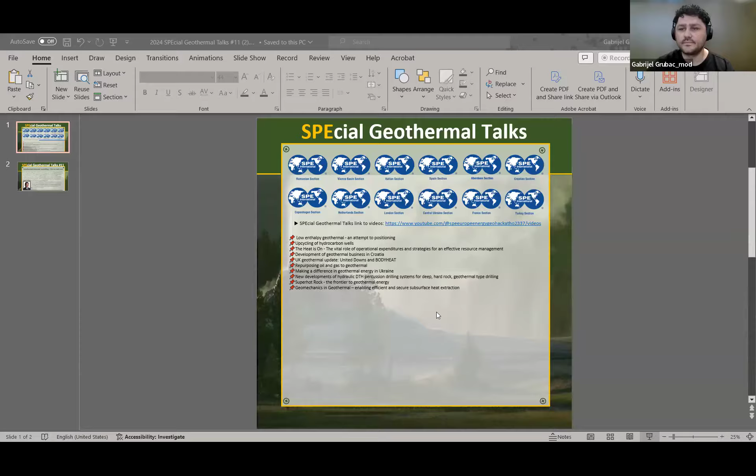I just wanted to give the audience a little bit of background on what the special talks really are. It's an effort, now with a lot more sections than when we started. We're 12 now, and I'd like to thank the SPE Aberdeen section for joining us recently, and Stewart for support in this. We have done, as you can see on the list, quite some interesting talks with some really involved personnel in the geothermal world and the oil and gas world.

The idea behind all this really was to educate the public, but also to keep strengthening the ties between oil and gas and geothermal, because there's a lot that we can learn from each other. This has turned out to be a good way of doing this.

As you can see, there is a link here, the YouTube link that I will put after in the chat box, and you can access it there and go back and watch all the other talks we did last year. We did everything from geothermal in Croatia to the body heat project to percussion drilling, a lot of interesting topics.

Without further ado, I would like to introduce our speaker today, Carlos Granado, who's got quite some extensive experience in reservoir simulation. Initially, when we had a talk with SPE Spain, whom I would like to officially thank for making this happen, the question we asked is, what are the topics that are of interest? And reservoir modeling, trying to understand the reservoir, is one of those things.

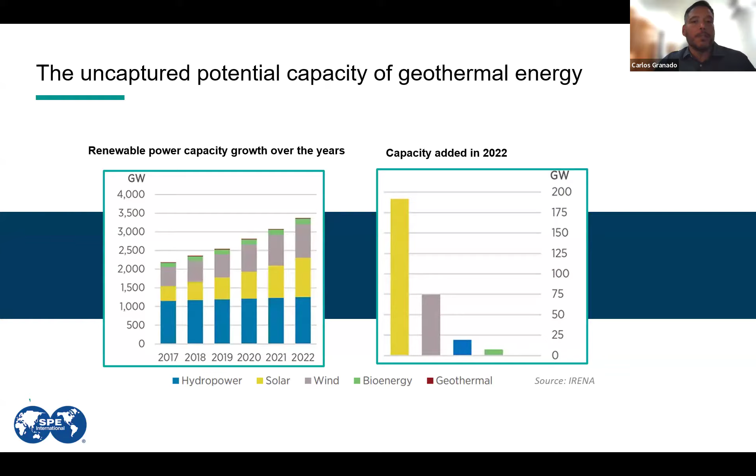Okay, so maybe it's time to start talking about the agenda. We're going to go into the introduction of geothermal energy. We're going to look at some specialized geothermal examples. We're going to be creating a basic geothermal case in order to show how easy it could be to generate at least the initial stage for modeling geothermal in a reservoir simulator.

I'm sure we're already aware of what geothermal energy is. It is a type of renewable energy taken from the earth's core. It comes from the heat generated during the original formation of the planet and the radioactive decay of material. This is a naturally occurring source of renewable energy.

As we know, the mantle rock named magma gets to some spot close to the surface near the crust, and this typically happens near tectonic plate boundaries, which are the areas where most volcanic and earthquake activity happens. When the magma comes toward the crust, the rock and water absorb the heat and create the geothermal reservoir, which is the basis of our activities for developing the energy.

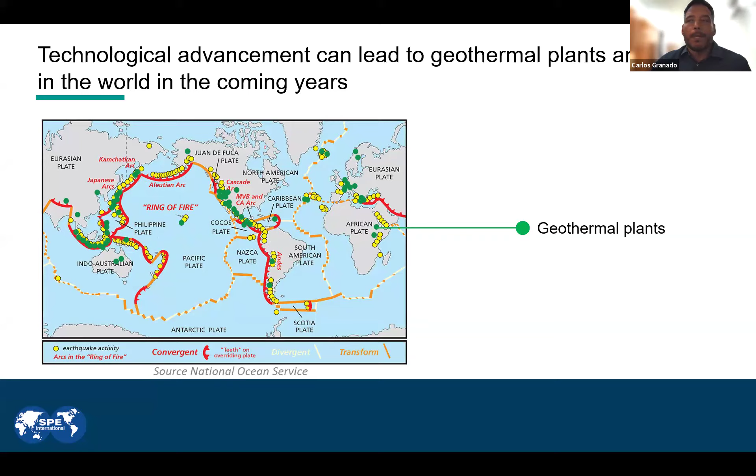Let's talk a little bit about the advantages and disadvantages of geothermal energy. Maybe this is the reason why geothermal hasn't been largely developed. Geothermal has a huge potential.

The current consumption is around 15 terawatts in the world, which is far from the potential of this energy. The geothermal resources right now, the installed capacity is around 17 gigawatts, which represents 5% of the total potential. Governments are trying to increase the amount of geothermal by reducing costs; the potential for generating energy from enhanced geothermal in the US is about 100 gigawatts, which is 25 times what we currently have, and could provide energy to at least 100 million American homes.

It is sustainable. Geothermal provides a reliable source of energy compared to other renewable resources, such as wind and solar. This is because the resource is always on, basically 24/7, 365 days a year. It doesn't depend on conditions like wind and solar do, so it's really sustainable and reliable.

The energy generated from this source is easy to calculate, since it doesn't fluctuate in the same way as other energy resources. It means we can predict the power output from the geothermal plant with a high degree of accuracy. On the other hand, we don't need to invest in any technology to convert this energy, or store it in big batteries or fields or anything. So this also has an advantage.

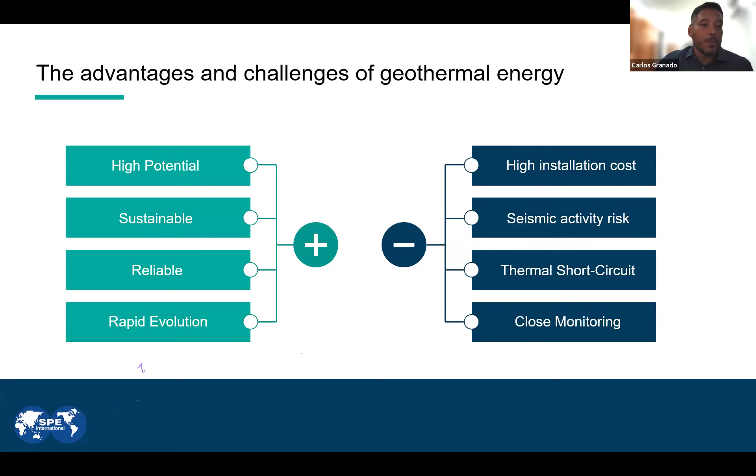So far, we could classify reservoirs into 3 types. We have the conventional geothermal source, which is more similar to an oil and gas reservoir. You could have a fault or fractured rock, which you could inject into or produce from, and obtain the heat or energy out of it. It requires faults, fractures, and some permeability in the reservoir, and also water, in order to be able to obtain the energy.

The second type is different, because there is no permeability and there is a possibility of having no fluids in it. So you need to create the conductivity by creating permeability, fracturing the rock and injecting fluid from one end and producing it from the other. This is called an enhanced geothermal system. There is an important amount of uncertainty related to it, because we are not necessarily aware of the stresses in the formation, since these are basically unknown formations. We need to account for and be sure that the way we are fracturing, and the way these fractures are behaving, guarantees that the project is going to be viable. So this is a big uncertainty to account for.

The third category, which is the most developed scenario in recent years, is closed systems. It consists of recirculating water from one end of the reservoir to the other end through vertical injectors that may connect to a bunch of multilateral wells at the bottom of the reservoir. It works like a big heat exchanger or radiator. We need to clearly understand the impact of the rates of water flow, the exposure of this water, and the time of exposure of the water to the formation, in order to understand the amount of heat or energy we can get out of this interaction between the water and the heated formation. This is important to account for, doing reservoir simulations as we are going to be talking about.

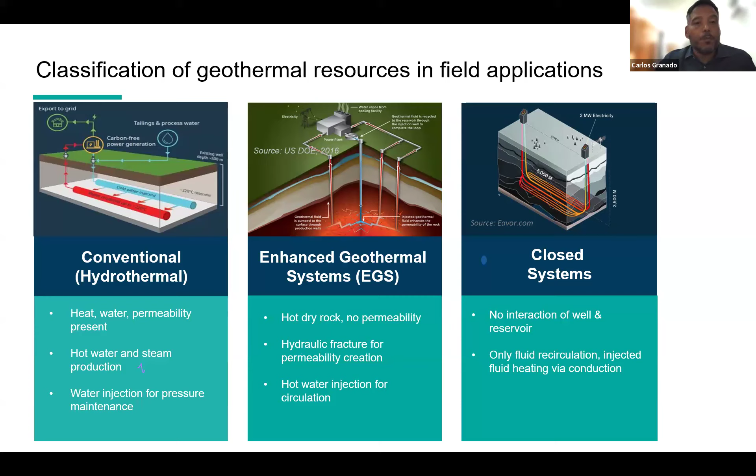Let's jump directly into the risk factors that involve geothermal projects. We have a bunch of factors that affect or create risk. We have political risk, regulatory risk that is usually insufficient and contradictory, and weak legal frameworks that don't help our case.

We also have financial risk because it depends on markets that might be fragmented, inefficient, and suffering from currency fluctuations. So at the end, the resources are not necessarily there.

As mentioned in the beginning of the presentation, we know some companies have benefited from programs launched by the U.S. government, by the Department of Energy, particularly the geothermal power earthshot, which is looking to reduce the cost of enhanced geothermal technologies by around 90% of what they cost right now. This is going to largely impact the feasibility of applying this type of project in other parts of the world.

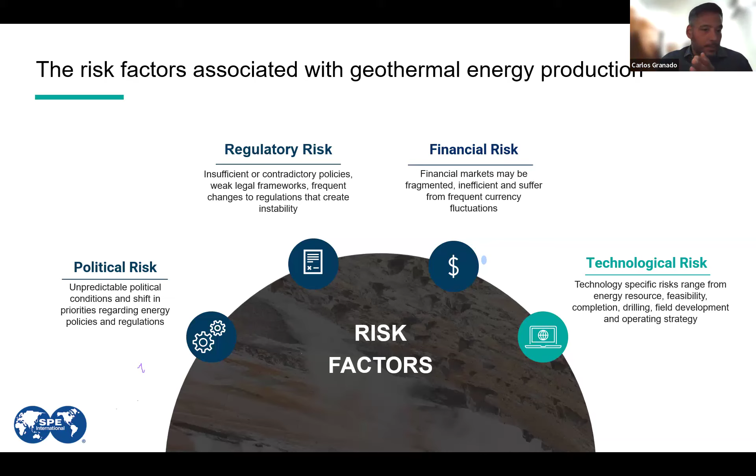Talking directly about the physics involved in geothermal reservoirs, companies should account for technologies that represent all these physical phenomena to grant a correct representation of the processes.

Let's start with fluid flow in porous media. Importantly, most of the flow in the geothermal reservoir occurs in natural fractures present in the formation, or generated in igneous rocks due to thermal stresses. Permeabilities are very small in this rock but still might account for some flow. The correct representation of flow in the fractures and the matrix is really important to accurately represent the physics of the process.

Heat transfer - conduction, convection, dispersion, counterflow of steam and water - whether the geothermal system is natural or man-made, heat transfer is the most important phenomenon, and it will be critical to evaluate the amount of energy you can obtain from the resource. This type of production strategy optimization is really important in order to get the best out of the resource regarding energy.

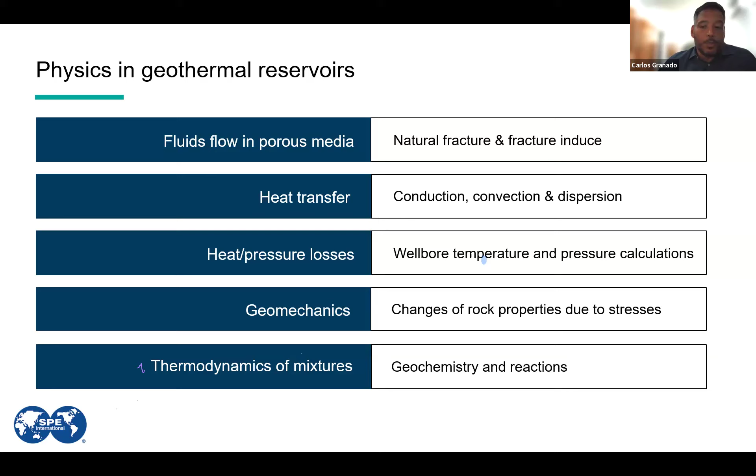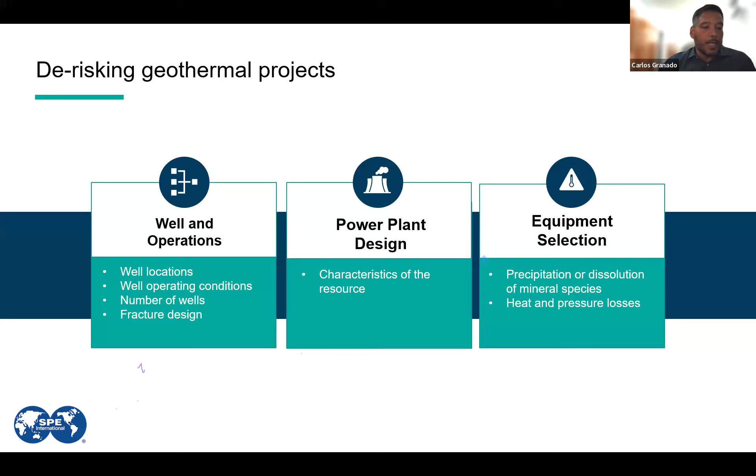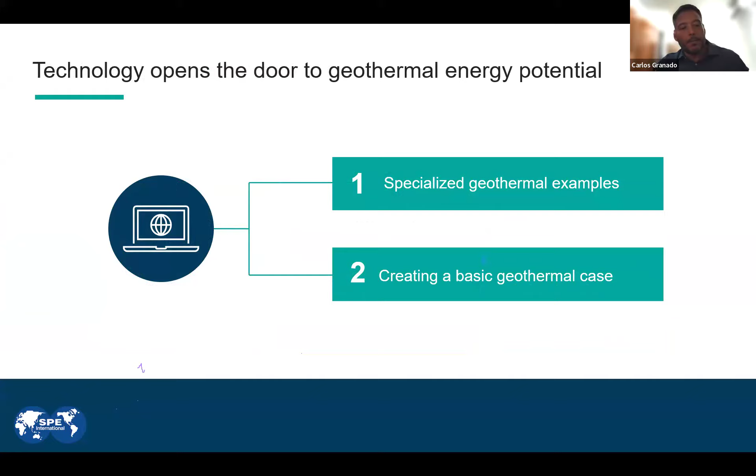So after talking about the physics, the phenomena, and the risks we have to overcome to implement this type of process, I'd like to go directly into the specialized geothermal examples that I prepared, doing this directly in our post-processor to make it more interactive.

The first case is a standard geothermal case. This consists of the completions of various production wells out of a geothermal reservoir. Here we account not only for the location, the type of completion, and the spacing between the wells, but also the possibility of cooling down the formation, or increasing the productivity of the energy by adding injector wells into the system.

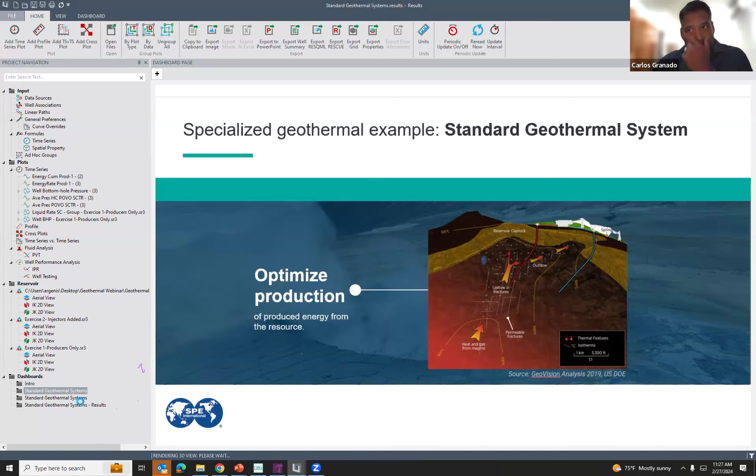I'll show you the impact of this. As we see here, we account not only for spacing, but also for the configuration used to produce the water. In this case we add different types of isolations into the system, and different tubing configurations, to find the best way of achieving the best temperature from the perforations into the wellbore. We also added some injecting wells into this case study.

Give me a second. Give me a sec. Give me a minute.

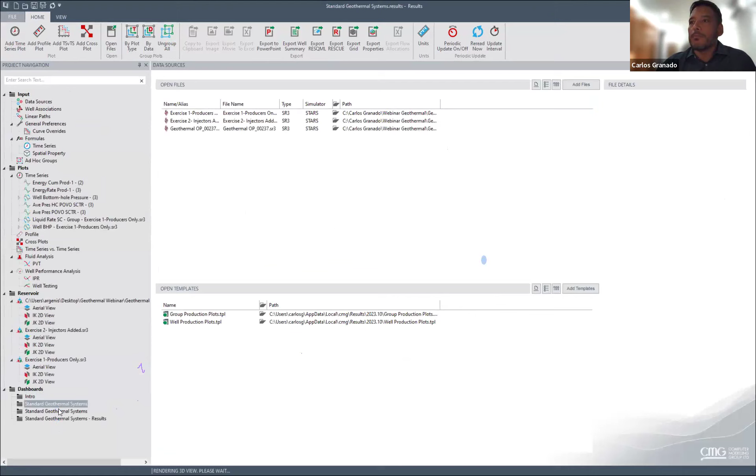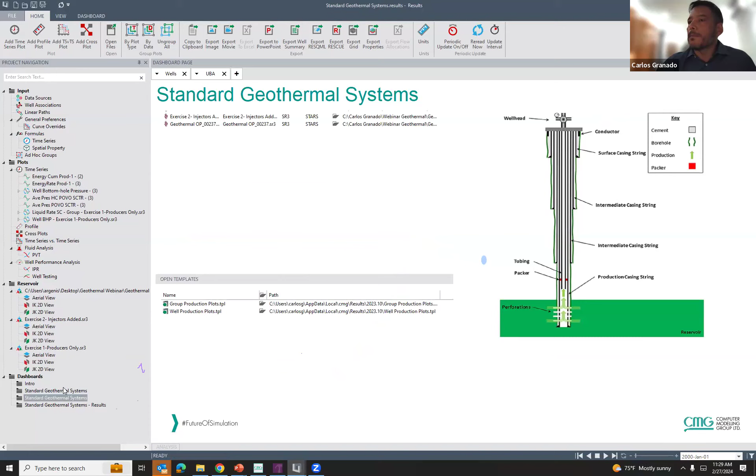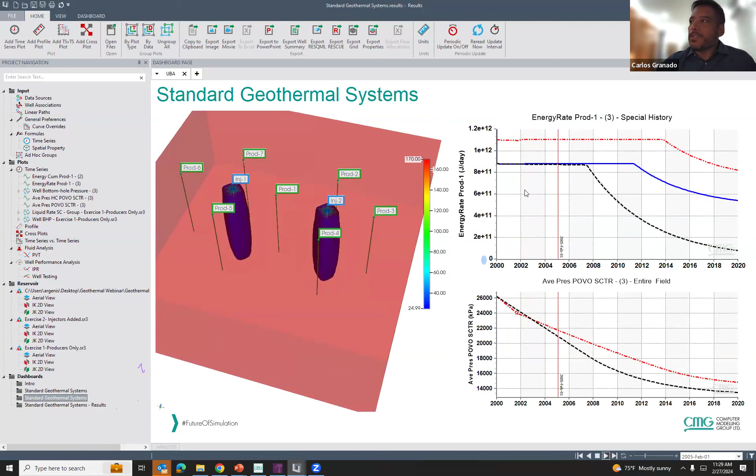Okay, sorry about that, I had a crash. So right here, I'll show you how we can see our original output for the energy, shown as the black dot, while we were just producing without any optimization on the well locations.

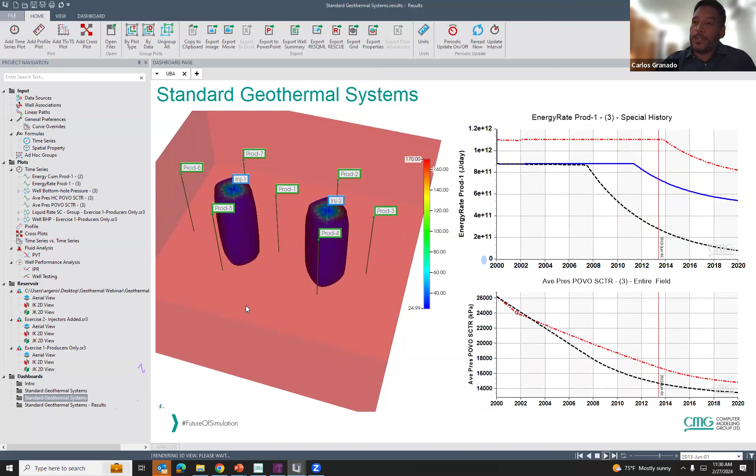In the second case, we tried to come up with a better configuration strategy and completion setup to achieve the highest temperature in the reservoir. In the final stage, we included some injector wells to increase the energy potential. We see how we can increase the energy of the project by almost 30%, a big change compared to what we originally had. This is why it's so important to run these optimizations, to find the correct, optimum strategy to obtain the maximum advantage of the resources.

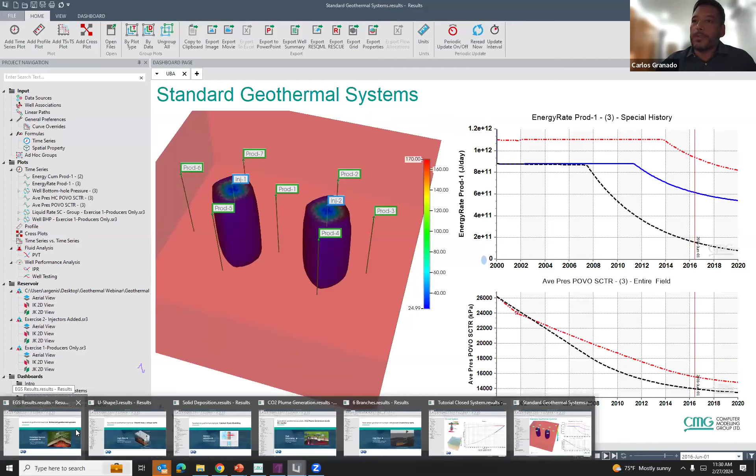The second case we'll present is an enhanced geothermal system. As mentioned, there's large uncertainty to account for in this kind of evaluation, because first we need to fracture the wells to create conductivity between the injectors and producers. We also need to account for the water and rates we use to expose the water to the heat of the formation and exchange heat.

We also need to account for what happens to these fractures once you start injecting water. The thermal stresses cause the fractures to open a bit more because of the cold water injection, and the compaction of the rock opens the fractures instead of closing them, as we see in the oil industry, creating a preferential path for the water to go directly from the injector into the producer.

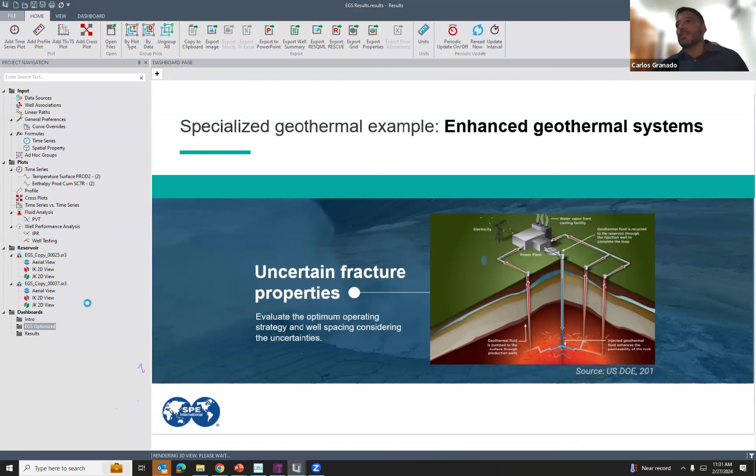So we use this technology to represent unconventional reservoirs in general. We model the fractures using what we call a tartan grid, or a logarithmic scale local grid refinement. With this technology, we guarantee we can represent the exact behavior of the fractures and the effective permeabilities from one well to another.

In this case, we were able to optimize the spacing. Let me stop a bit here - this shows two horizontal wells, one on top and one below. As you see, if we place the wells too close together, we risk having the water travel directly through the fractures from the injector to the producer, without enough exposure to heat, which ends up cooling down the formation inside.

So what we do here is we optimize not only the rates, not only the completions, but also the spacing between the wells. And we accounted for the fracture property changes during the process. With that, we managed to increment the production, at least the temperature of the produced water, by 15%, which is an important advantage compared to what we originally estimated.

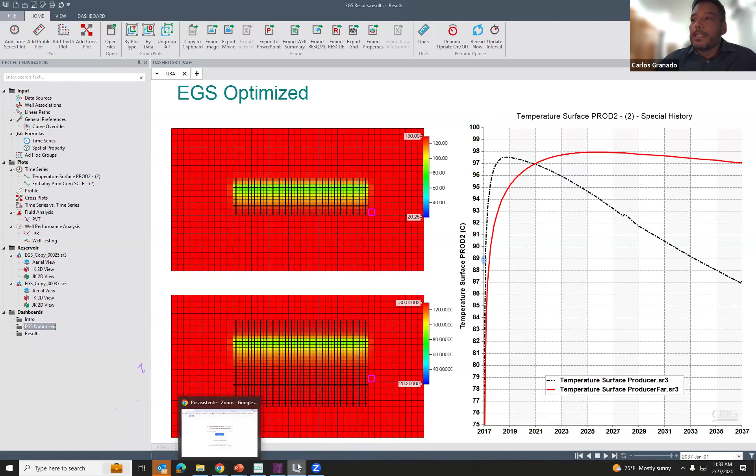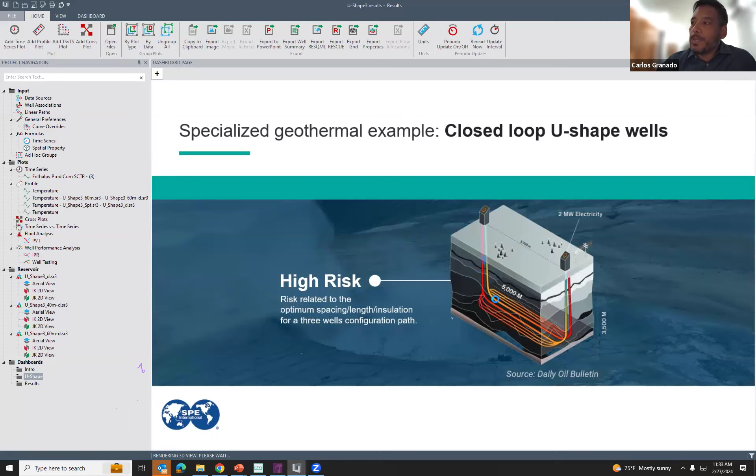Let's go into the third case. The third case is a closed loop U-shaped wells geothermal system. This is interesting because, as I mentioned, these are big heat interchangers, and the question to be answered here is: what's the distance, what is the length of these wells, and what is the distance between them in order to avoid cooling down the formation and having some kind of thermal short circuits? We performed simulations where we are able to represent the U-shaped wells in the simulator, and you can see them here graphically.

With this, we create sensitivities on the distance, the length, and the rates that we are going to be using. But the most important thing to show here is that if you compare the simulations between having the wells located at 20 meters, 40 meters, or 60 meters, it has an important change on the performance of the temperature, especially because when the wells are too close, the formation starts cooling down.

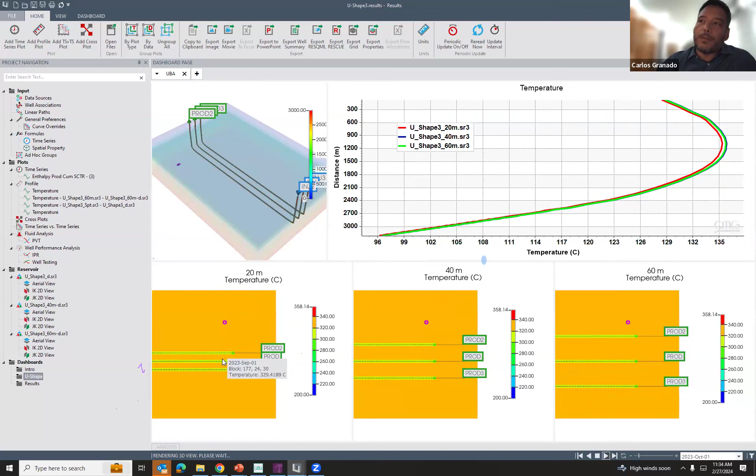I'm going to move forward to the end so we see the results. We see that with 20 meters, basically the formation is cooling down, the whole surroundings of the well cooling down after 10 years. The same happens at 40 meters. But when you have 60 meters, the heat of the formation keeps heating completely the surroundings of the well, incrementing the temperature of the head of the reservoir by around 15%, which is an important change compared to what we originally got.

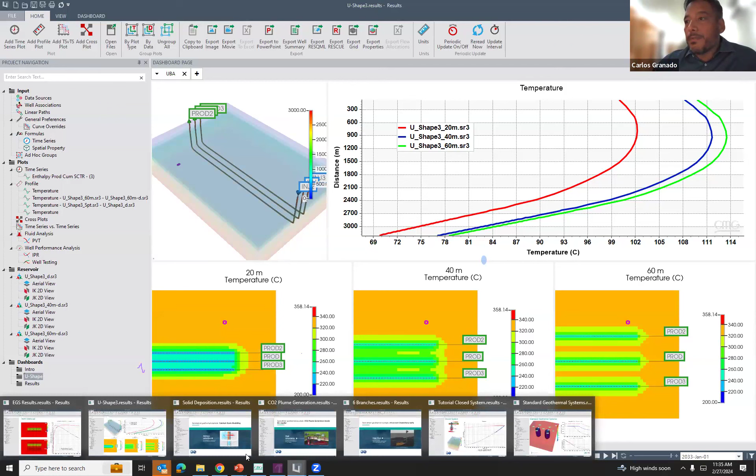The important thing here is that there is technology that allows you to represent the U-loop. This is not an easy task, to represent that from one end you are injecting, from the other end you are producing, and what happens in between. This is hard work to achieve, but technology has taken us to be able to represent this type of completion, and it's available for the public. So it is interesting to have.

Another case we can discuss is the calcium carbonate case. As we know, there is a lot of carbon dioxide present when you have geothermal fluids. With the pressure drops, the chemical equilibrium of the ground changes, and some of the CO2 might release into the gas phase. This process generates a kind of super-saturated calcite that will start depositing not only in the tubing but also in the formation, and this might end up affecting the flow in our system, and of course affecting the amount of energy we get out of the reservoir.

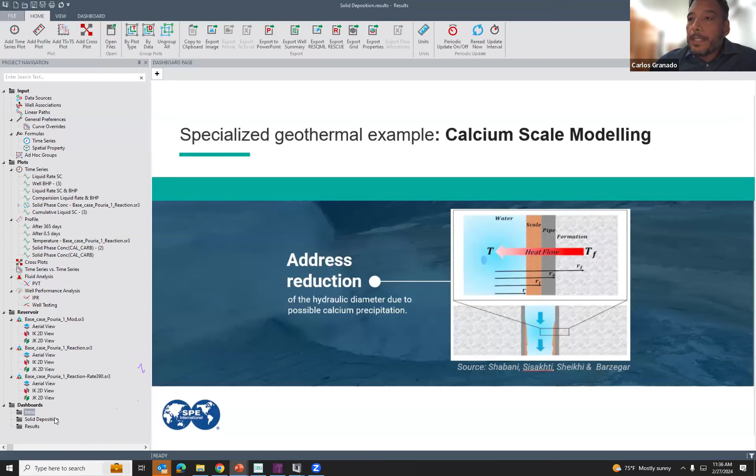We generated a case study using the results of calcite deposition, modeling the autoclave experiment into our simulator, and then taking it into the full field case. We can see here that after we complete the well and include the calcium carbonate precipitation, over time we see solid concentration increasing in the system. As a result, the hydraulic diameter, the effective diameter of the tubing, starts being affected exponentially.

If we compare what the results would be without including the chemical reactions or the calcite precipitation, we see that we estimate a completely wrong way of producing the energy. When you start including the calcium carbonate precipitation inside the system, we see the reduction of the liquid rate because of the reduction of the hydraulic diameter of the tubing. The interesting thing here is we use our optimization tool to find the optimum rate that allows us to produce the maximum amount of energy without causing the deposition of solids.

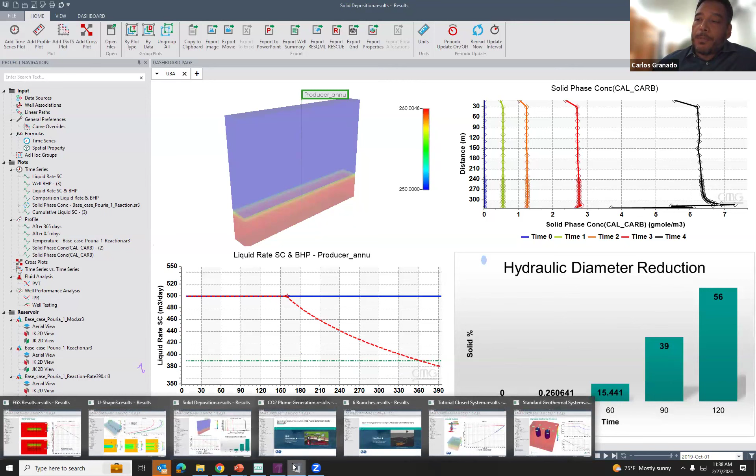We found that by just reducing the liquid rate in the system by 20%, we managed to avoid the precipitation of solids inside it. So this is another case that shows simulation can end up saving a lot of time and effort before implementation, or the calculation and estimation of what we're going to be producing from the resource. Another interesting case I wanted to talk about is the thermosiphon.

Thermosiphon is a combination of geothermal energy with CCS. Basically, we inject CO2 into a saline aquifer, and then we use the CO2 as the fluid to extract the energy out of it. Using CO2 as a subsurface fluid to extract energy has several advantages over water and brine, as it has much lower kinematic viscosity than water and brine, and the mass flow rate through the reservoir is higher than when you use water or brine in a geothermal system.

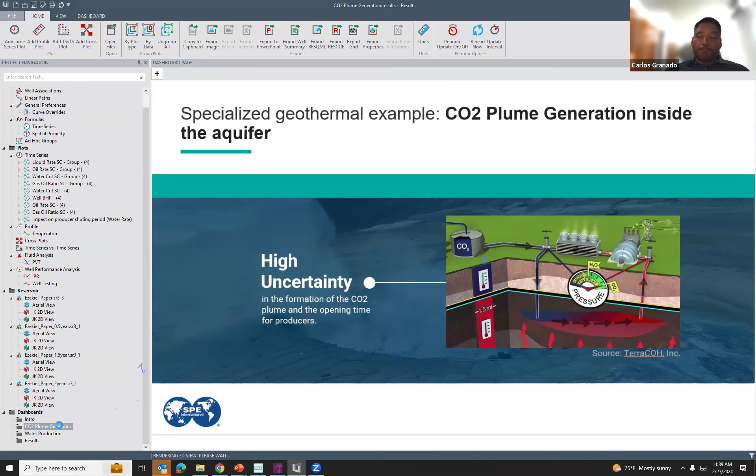The most important thing here to start is the generation of the CO2 plume. During this time, CO2 is injected into the reservoir to displace the brine in the production wells, creating what is called a CO2 plume. This stage is crucial because there needs to be sufficient CO2 in the reservoir to minimize the water coming out of the production wells before production commences.

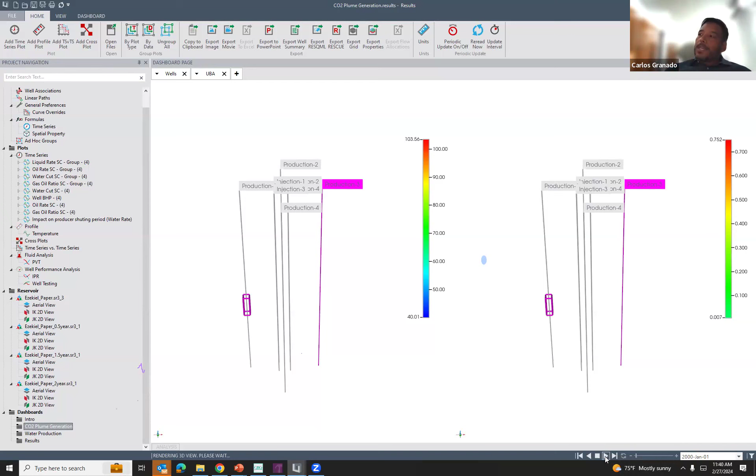During this stage, you want to displace the water out of this configuration of wells in order to allow the production of CO2 to be higher than at least 92-94% compared to what you produce in water. So the optimum point is to have a gas saturation at the producers that is over 60% compared to the original saturation.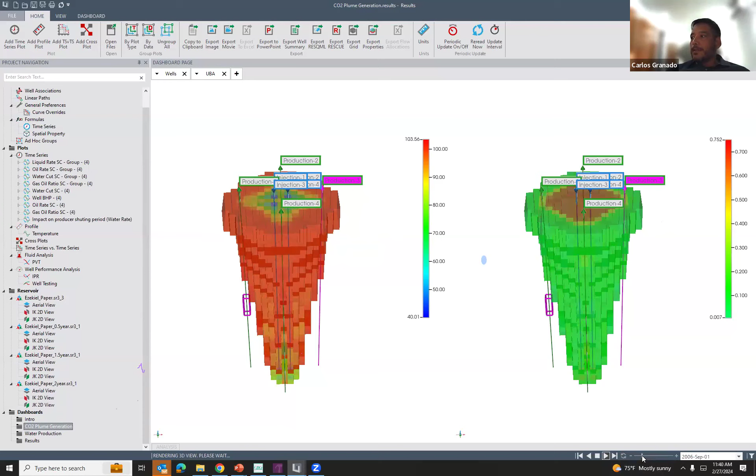We can see here in the two plots, on the left side is temperature. You can see how the CO2, once injected, gets heated, and on the right side of the screen, the saturation of the gas ends up being close to 60-70% near the wellbores, which confirms that the formation of the plume is correct and that the water is displaced out of the producers.

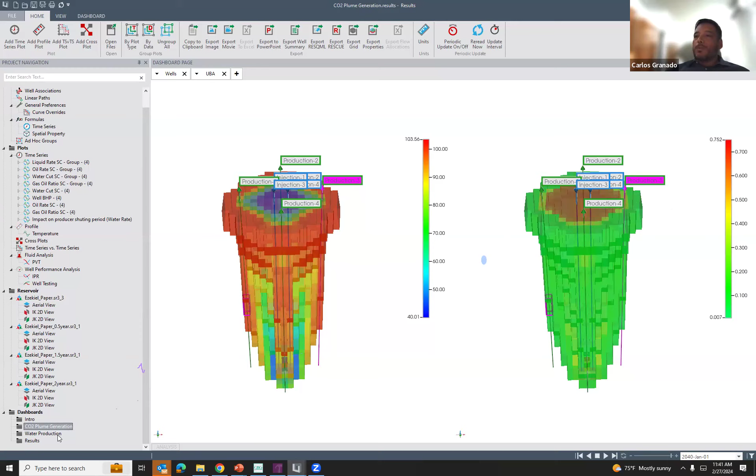The CO2 plume formation is a case with a lot of discussion, because it depends a lot on permeability, porosities, and also the configuration of the wells. But at the end, we are trying to model here what would be possible if we implement this type of project. We end up doing sensitivities on the closure time of the producers.

Keeping the injection going and keeping the producer wells shut for 2 years ensures the water is displaced out of them, and the production of CO2 being over 94%, which is good enough to grant the project. On the other hand, the temperature is sufficient to guarantee that the flash of CO2 at the surface will generate the power for the turbines that are going to be used, and then it can be re-injected into the reservoir again after the process is completed.

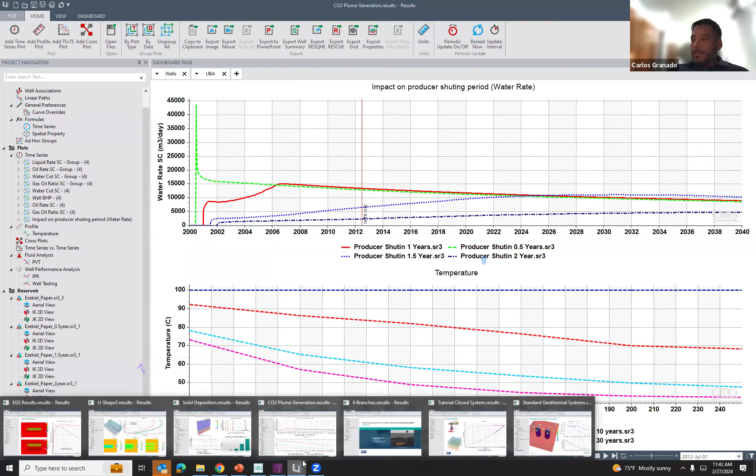The last case is not a developed case, but I just wanted to show you that there is the technology in order to implement this type of very complex loops.

This is a case of a configuration of a well, of 6 pairs of wells, where you inject on the top of the reservoir, or the top wells, and then you produce into the connected wells that are below to go to the surface.

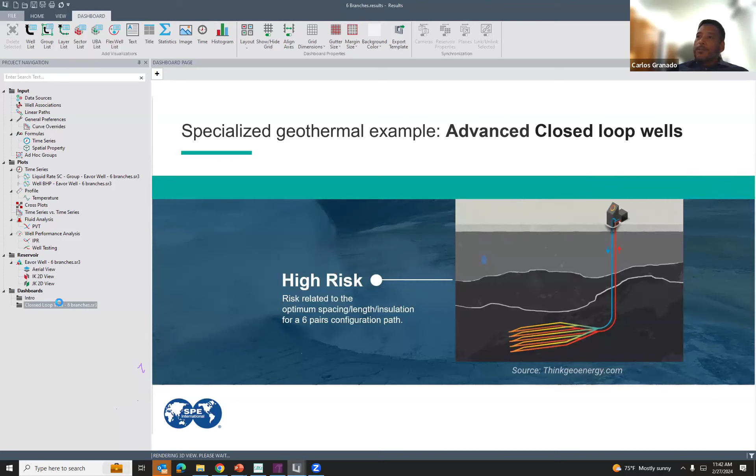It seems to be a very complex configuration for modeling, but we have managed to represent it in the simulator. At the end, we can confirm that we are able to represent the process. We haven't optimized this case - this is an original state - but what we wanted to prove is that we are able to model these types of complex configurations for further investigations.

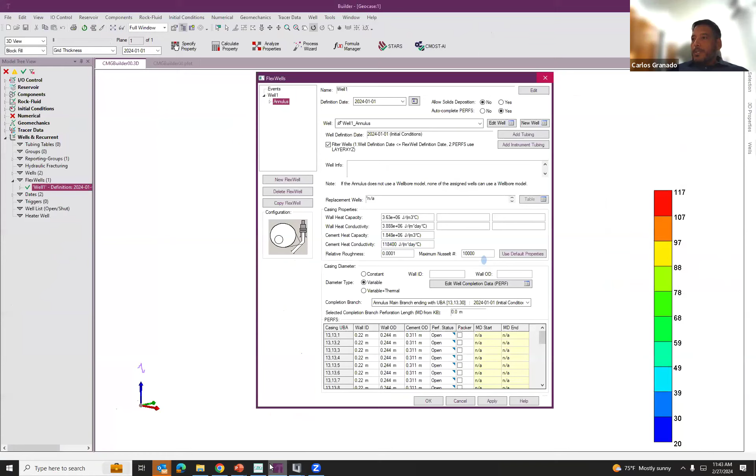Now that we have finished the case studies that I wanted to share with you, I'm going to give you a quick look at how we could generate an easy model from scratch. The idea here is to show that you don't need to be an expert in modeling or geothermal in order to generate at least the initial stage model to start working with.

I'm going to be using - it's not a matter of doing any commercial publicity or anything - this is a tool that I have available, and I just want to show you that there is technology advancing together with what is happening in the field in order to represent and model whatever we are applying in the field. I'm going to select the simulator, the thermal simulator that we use.

And a year of start, just to generate the single model, okay? We have a possibility of generating a model straight from scratch by just using a process wizard, where we have used this process wizard in order to generate several types of enhanced oil recovery processes, but in this case, I'm gonna model just the geothermal case.

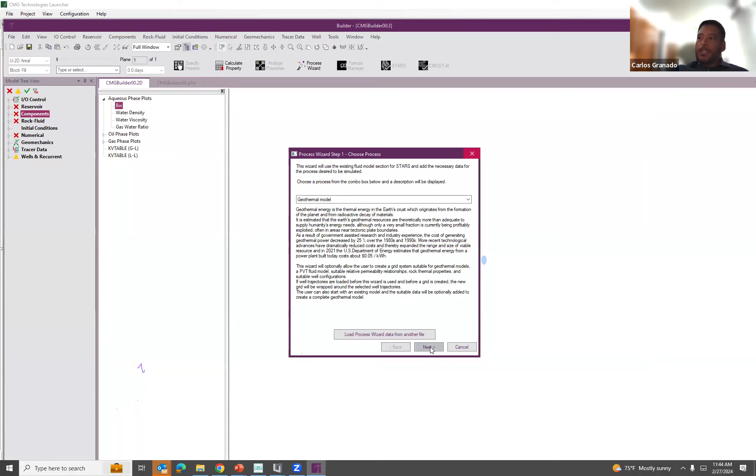When you click here, you kind of have an explanation of what geothermal is, what we aim to do with this wizard. We're gonna skip that, and go into the geothermal options. Here, we have the possibility of generating a closed loop geothermal, injecting a producer and an injector in the same well, annulus and tubing, or we could do a U-shaped well. I'm gonna go for the easiest case, which is just injecting from the tubing and producing from the annulus, or vice versa.

Once we open the wizard, basically you don't have any grid, you don't have anything. You just select whatever you want here for the properties of your model: permeabilities, porosity, size of the grid. If you want the grid to go into the top of the reservoir, just to account for the losses of heat in the wellbore from the bottom to the surface.

So we're gonna say to generate the model to zero, to the sea level, to the top level. I'm gonna just add some permeabilities, very low permeabilities, in order to represent a real system. I'm gonna use a reference depth of around 2,500 meters and an initial reservoir pressure of around 24,900 kilopascals. You can set the thermal conductivity of the reservoir zone, the overburden and the underburden, and change that if you have the data. If you don't, you can use whatever we offer here as a reference.

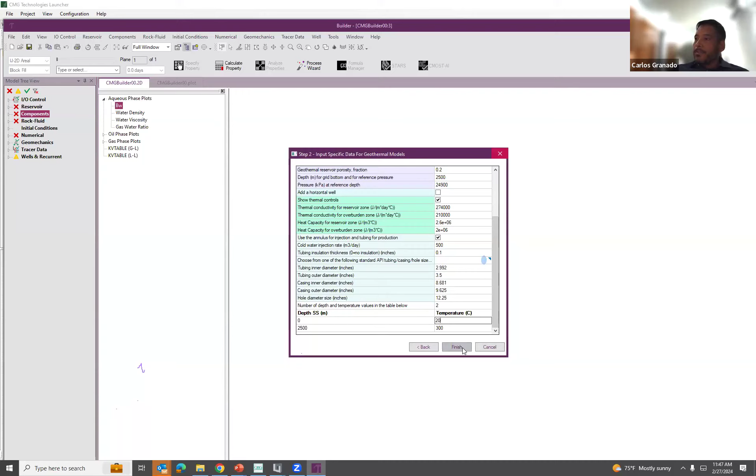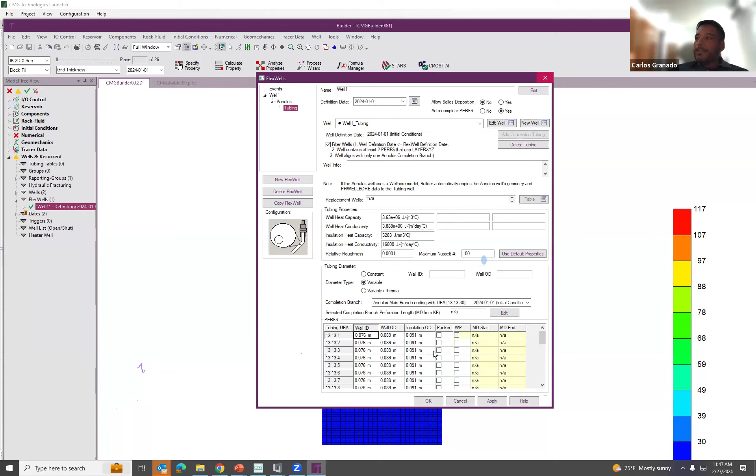If we finish, then basically you have your model created. You can go into the section of the wells and see that you have created the tubing and annulus properties, the thermal conductivities for the system, for the tubing and for the casing, and the diameters and the insulation that you have generated.

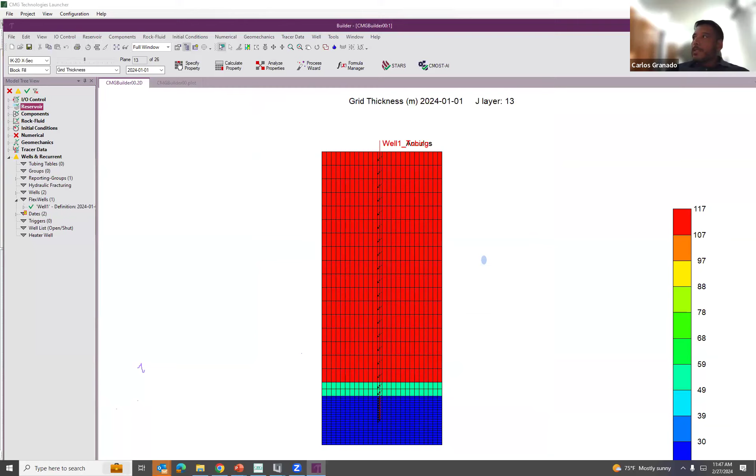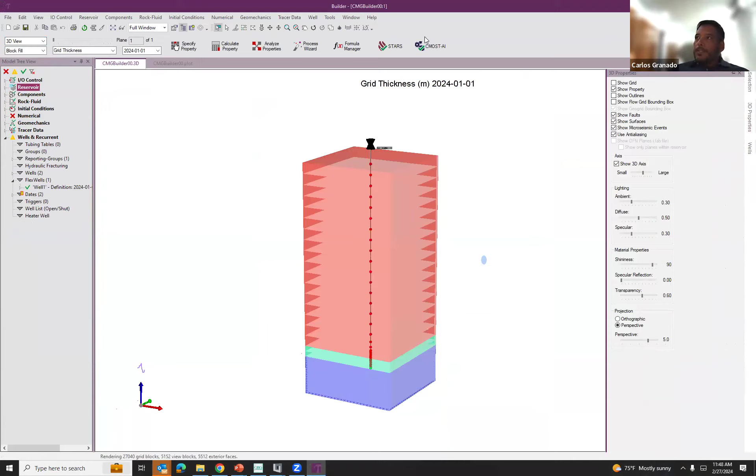We can go and select our reservoir grid. Let me go into the 3D section so you more or less see what we have generated. Right here, we can just delete the grid and create some transparency. And voila, you can see here how the grid sizes are really low in the reservoir, and then from the reservoir to the top you have larger grids because you just want to calculate the losses.

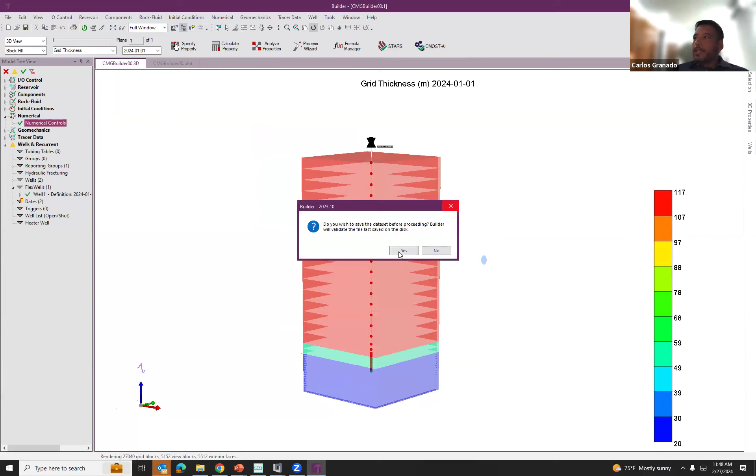And we can select the modeling of auto tune in order to use artificial intelligence to increase the simulation. And we can just run the simulation as it is, so we see the initial results. We run the simulation as it is.

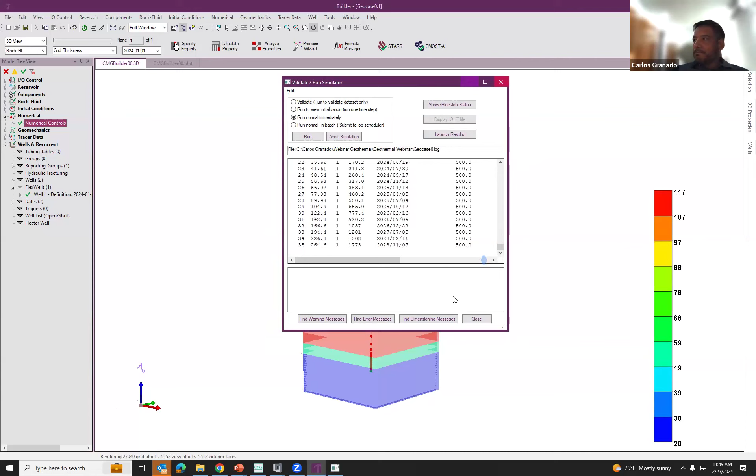You can see this is running already. We are injecting the water that we selected to be injected. And I guess this is gonna take like 10 seconds to run. Okay, running 18 seconds. Let's close that. Let's go directly and see the results of what we got.

We can see here that we have just generated a closed system easily from scratch. We go back to the initial result. We can see how we are injecting cold water, and when it goes down into the system and gets exposed, it goes up again, and we end up producing water of around 70 to 75 centigrade at the top of the reservoir.

It was really easy to set up, as you saw, and I just wanted to show you that it's not that difficult to generate that geothermal case from scratch with the current technology.